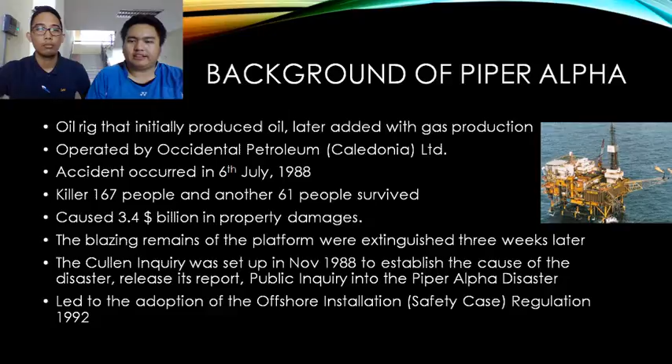So the chronology of the accident: the initiation of the accident happened through the leakage of gas product at a valve inside the backup propane condensate pump at the processing area. The gas leakage continued until it was ignited and caused an explosion. The explosion blasted through the wall and spread fire onto other oil lines. There was an automatic deluge system designed to spray water on the fire, but it was never activated because it had been turned off by the explosion.

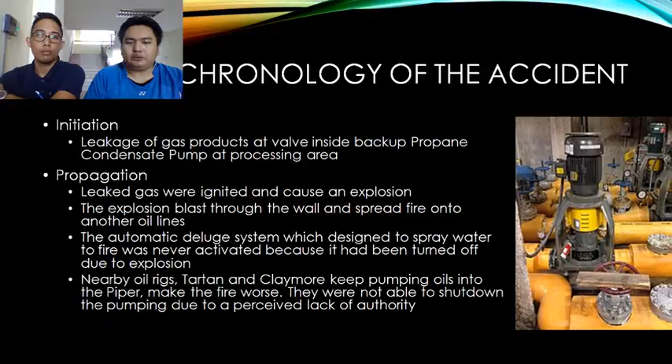Furthermore, there are nearby oil rigs, Tartan and Claymore. They kept pumping oil into the Piper Alpha, making the disaster worse, and the workers were not able to shut down the pumping due to a perceived lack of authority. So after that, the fire continued to burn for another 3 weeks until it was extinguished by the firefighters. There were $3.4 billion in losses due to products such as oil and gas being consumed by the fire.

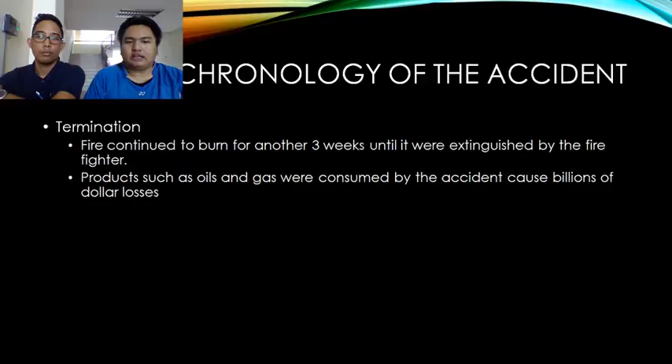I would like to touch on a bit of detail of the accident. On the morning of 6 July 1988, routine maintenance procedures were done on the backup propane condensate pump. Usually at oil refinery plants, the pumps come in a pair, the main pump and the second pump. In the morning, maintenance was done on the backup pump to check the pressure safety valve. But the maintenance could not be completed by the end of the day at 1800. Then the workers decided to seal the valve using a flange, and it was tightened by hand.

Later, during the night shift, the primary propane condensate pump failed. After that, the night shift workers decided to use the second pump, which was still under maintenance, and the workers turned on the pump. As a result of that decision, the gas products escaped from the hole of the valve. After that, the pressurized gas was ignited and exploded.

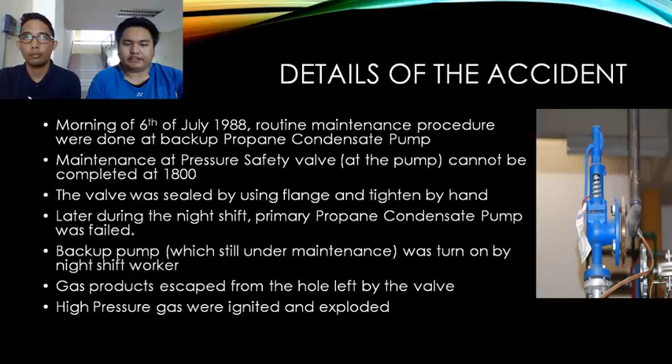I will discuss the human factors, which include plant and equipment, process, and the people. In the plant and equipment, as you can see here, the design of the facility did not include sufficient protection of the structure against intense fire, nor appropriate safety systems. And the layout of the platform design allowed the fire to propagate quickly from production modules B and C to the critical center, and it destroyed the control room and the radio room in the early stages of the accident. And the electrical power generation, public address, general alarms, emergency shutdown, and fire protection systems also failed shortly after the first explosion.

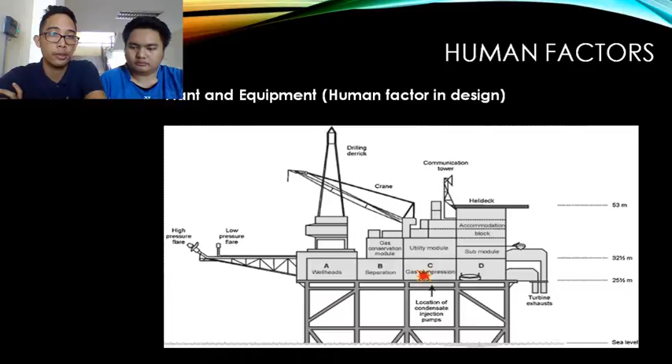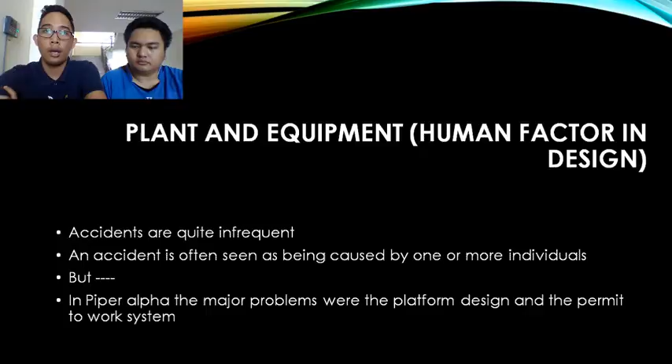And for the process, accidents were quite infrequent at the time. So accidents are often seen as being caused by one or more individuals. But actually, at Piper Alpha, the major problems were the design and the permit to work system itself, which should mitigate accidents.

Under the process, as you can see here, it was mentioned that the backup propane condensate pump needed to have its pressure safety valve checked. But unfortunately, by 1800, the worker was not able to finish. Instead, he left the rest of the work until the next day. And the tube was sealed with a plate and just left.

And what happened? Later in the evening, during the next shift, the primary condensate pump failed, and none of those present were aware that a vital part of the machine had been removed, and they decided to start up the backup pump.

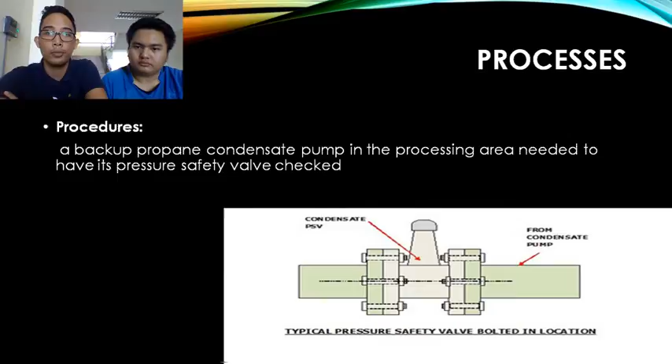And the gas products escaped from the hole left by the valve. The gas audibly leaked out at high pressure, ignited and exploded, blowing through the firewalls, and fire spread through the damaged firewalls. It happened during the process.

For the risk assessment of the incident, according to Lord Cullen, he identified four major human errors that contributed to the severity of the incident. It includes the deficient analysis of hazard. Second one, inefficiency in the permit to work system. Third one, inadequate training in the use of the permit and emergency response procedure. And the last, there was a breakdown of the chain of command.

This is the critical part, which is the lack of any communications to the platform crew, which continued pumping the gas and oil by the Tartan and the Claymore platforms, and was not able to shut down due to perceived lack of authority. And even though personnel could see the Piper burning, they could not do anything.

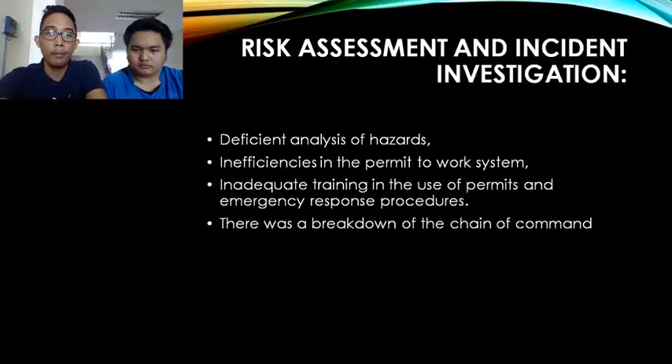Next is about safety critical communications factor. So after the investigation was complete, it was discovered that the pump that had been turned off was a failure of the permit to work system that you can see in the picture. It was a system of paperwork designed to promote communications between all parties affected by any maintenance procedure done on the platform.

But in this case, in Piper Alpha, it had become too relaxed. The employees relied on too many informal communications, and communications between shift changes was lacking. If the system had been implemented properly, the initial gas leak never would have occurred.

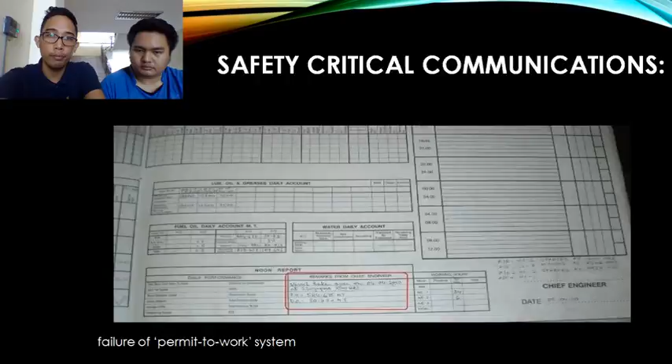And the last factor, which is the people. Under the people, there is a supervision and leadership factor. The superintendent on the platform, or we call it OIM, Offshore Installations Manager, he was panicked and he was ineffective almost from the beginning and during the accident.

Evacuation was not ordered, and even if it had been ordered, it could not have been fully carried out given the location of the living quarters, the layout of the topside, and the ineffectiveness of the safety equipment. Fireboats were at hand, but they waited for orders from the OIM to fight the fire.

Here is how the managing of human failures happens. According to the picture, you can see from the top down. O is the organizational factor that influences the A. A is the decisions and actions that influence the probability of the event. And E is the basic Piper Alpha accident sequence.

So in conclusion, in the picture, the meta decisions would include the process, procedure, structure, and the culture, which is at the organization level. When it fails, it will lead to failing decisions in specific actions, which is the decisions and actions level, done by the employee, and will lead to the ineffectiveness of component reliability, which causes the component failure and the operator errors. In summary, the root cause of system failure is top management's lack of making right decisions, leading to human error performance on the decision level and leading to the component failure.

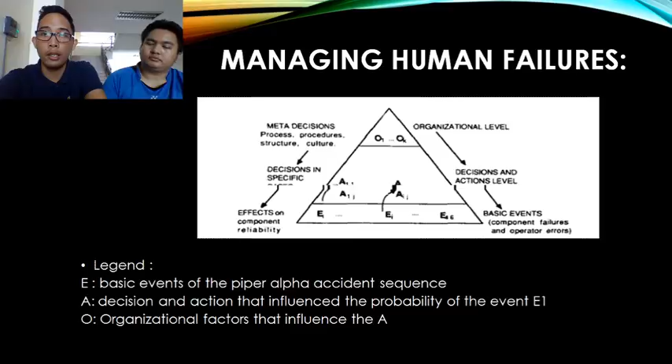For the behavioral safety, in this case of Piper Alpha, some people realized that the only way to survive would be to escape the station immediately. However, they found that all routes to the lifeboats were blocked by smoke and flames, and in the lack of any other instructions, they just made the jump into the sea, hoping to be rescued by a boat. 62 men were saved in this fashion, but most of the other 167 who died suffocated on carbon monoxide and fumes in the accommodation area.

So, for the platform design, there should have been sufficient protection against and mitigation of fire and explosion, as well as enough firefighting capability to fight the fire. This is of particular importance as there is no possibility to rely on outside assistance such as a fire brigade, which means that workers at the rig must prepare to face accidents such as a fire. They must rely on themselves without hoping someone outside will help them.